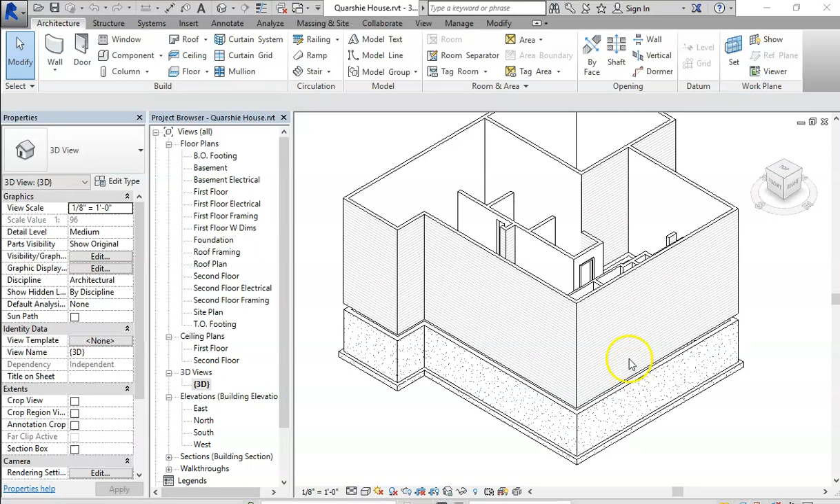We're in Revit. We're going to take a look at getting some floor systems in, but before we do so, I want to make sure that my walls are lined up with my foundations and that my walls are set to the right level. So I'm going to go to the first floor here. I'm going to take my template out of the way for a moment, and let's take a look at one of these sectional views to make sure that our wall is indeed aligned.

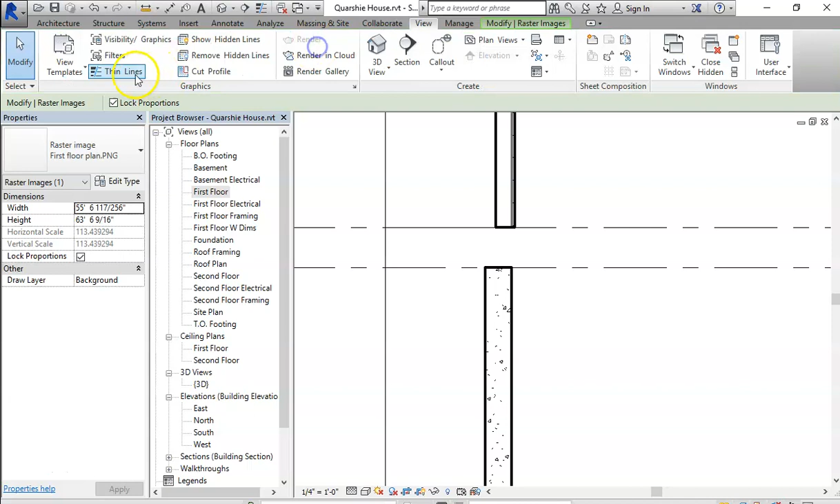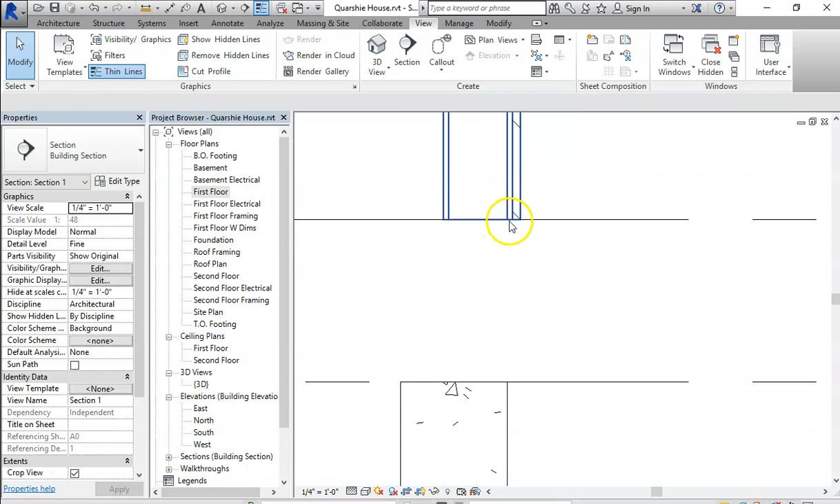When you're aligning walls, you want to make sure that your view is set to thin lines, which is right over here. And you want to make sure down here that your detail level is set to fine. Notice if it's coarse, I can't see anything here to get to the face of the core. So I've got my detail level set to fine, my view set to thin lines, and I can see that in this case the face of my core is lined up with my foundation.

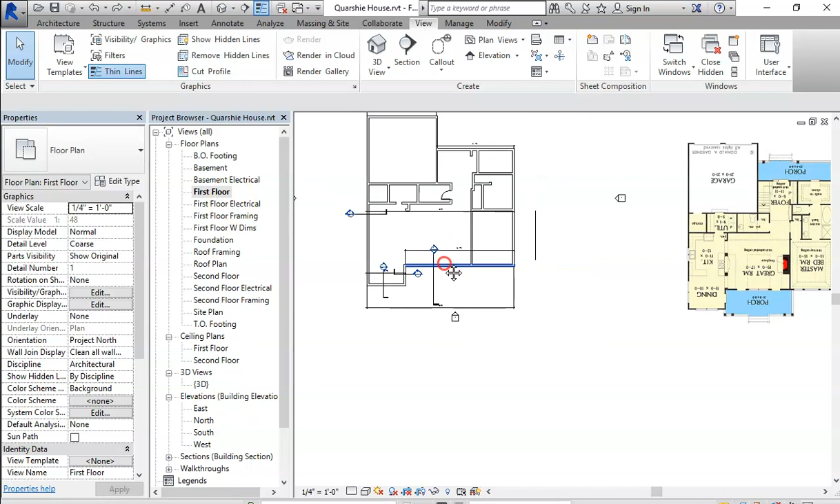As a matter of fact, if I click on it and move it, you can see that they move together. I'm going to hit undo because I don't want to move anything. So that's in good shape. Let's take a second peek and see if maybe some of them haven't been done yet. I don't see a sectional view over here, so I'm going to make a new sectional view.

So under view, I can go to section. I'm going to click right over here, and I'm just going to take the depth of my view in like this. Let's take another peek and see if this one's aligned. Once again, I can't see it yet because my view needs to be set to fine. That's set to fine. I don't think this one is lined up.

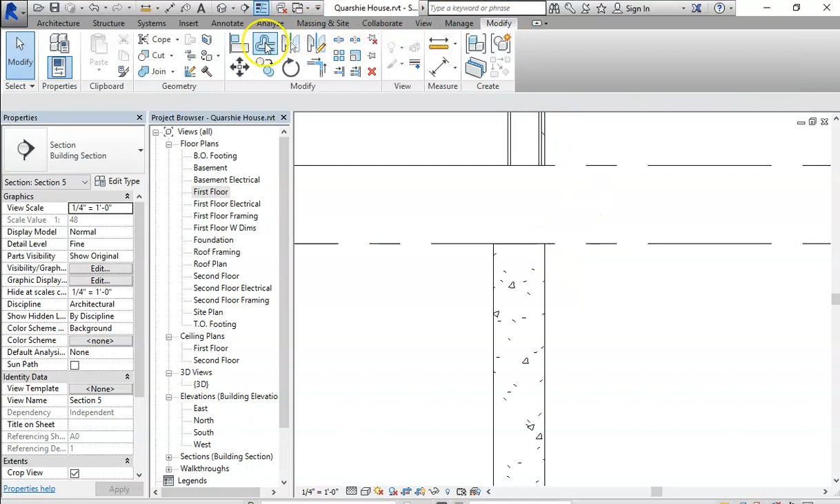So I'm going to go to modify. I'm going to go to the align tool here, and I'm going to select the face of the core. Select right here, and then I'm going to select my foundation, and I'm going to lock those together. All right. So that's how we take care of that.

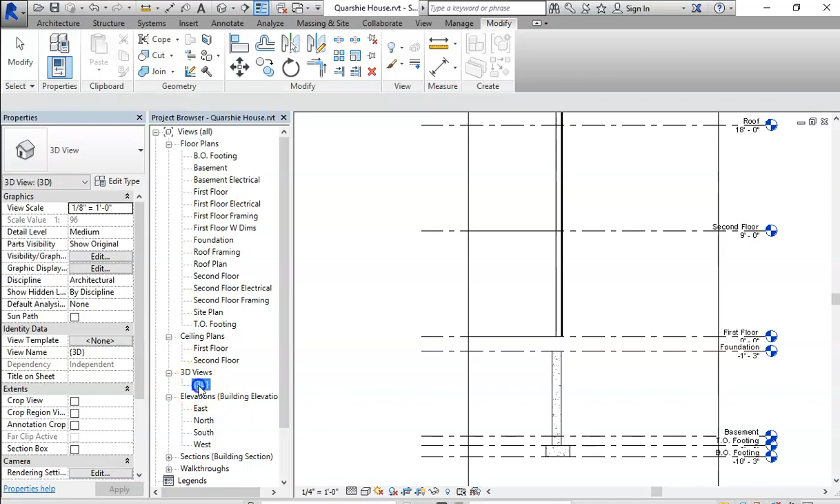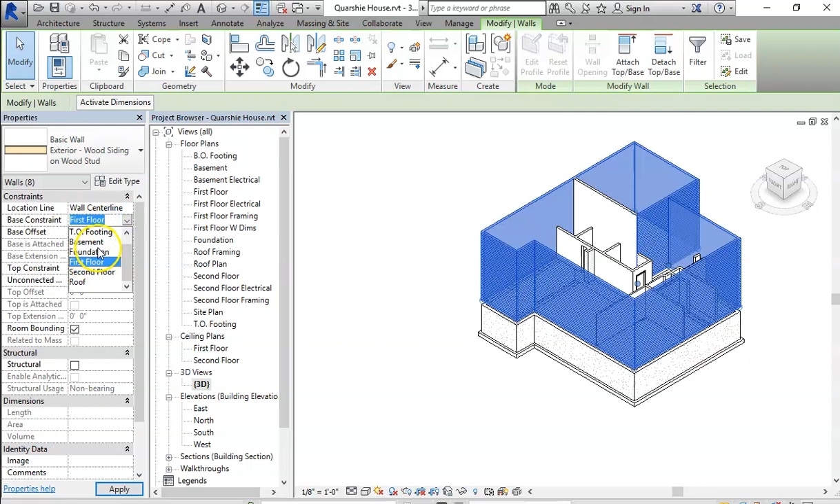I'm going to go back to my 3D view for a moment, and I can see that these exterior walls are not starting at the top of my foundation. So that's easy to change. I'm simply going to hold my control button down, and I'm going to select each of my exterior walls, and I'm going to come over here where it says base constraint, and I'm going to bring those down to the top of the foundation, and you'll see that it automatically moved those for me. I'm going to hit save because I'm happy with what I've done.

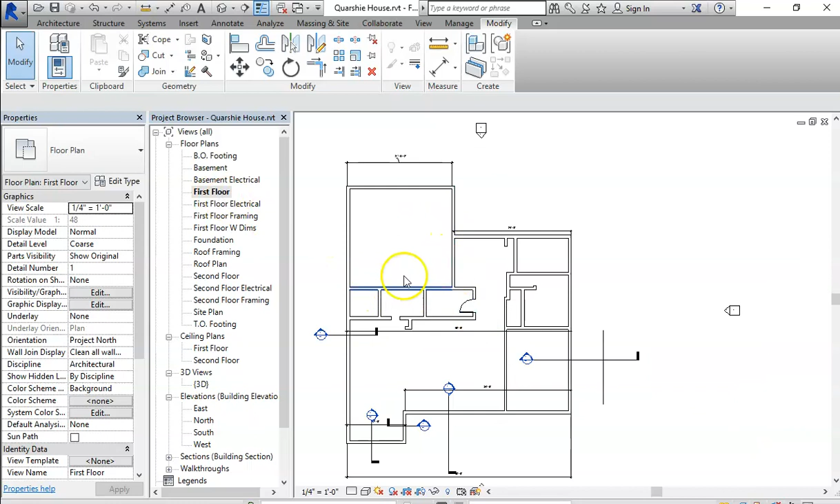Now on the inside of the house, I can see that these are exterior walls and they don't belong there. So let's go in and clean those up. I'm going to jump back to the first floor. Some of you probably have done that for your garage. You put exterior walls on the inside. So I'm in my first floor, and I'm going to drag this so it's just part of the exterior of the house. This one I'm going to delete altogether. And then I'm going to bring this back in for a moment so I've got a little bit of a guide here to draw my interior walls in.

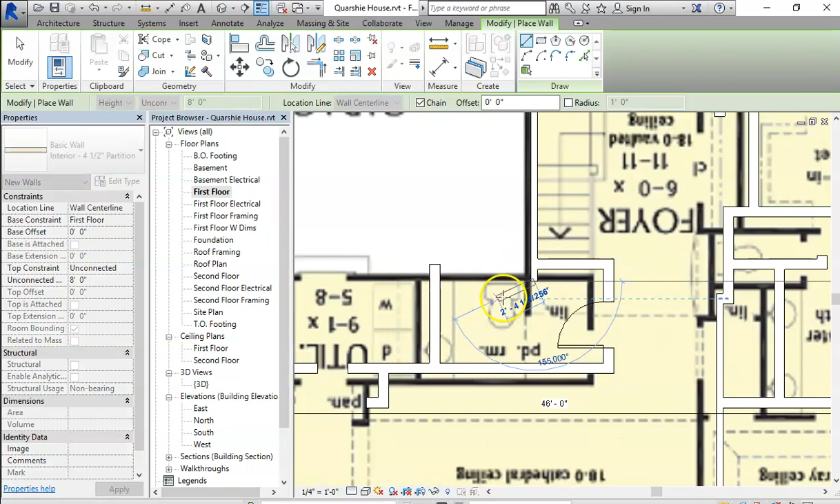All right, and I'm going to go to architecture and grab an interior wall now. So under wall types, I'm going to go down to 4.5 inch interior walls. And I'm just going to click right here and draw a wall across here. Now I can see that some of these other walls in here are also the wrong style. So I'm going to see if I can straighten these out.

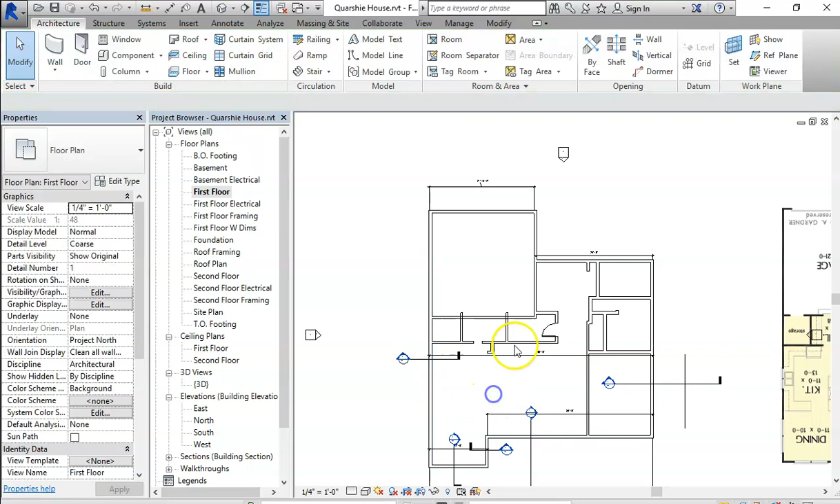Yeah, this is an exterior wall. This is an exterior wall. So if I hold my control button down and select some of these, I'm going to switch them to interior walls. All right, these walls actually need to go to here. So notice how Revit automatically heals those walls for you when you do that.

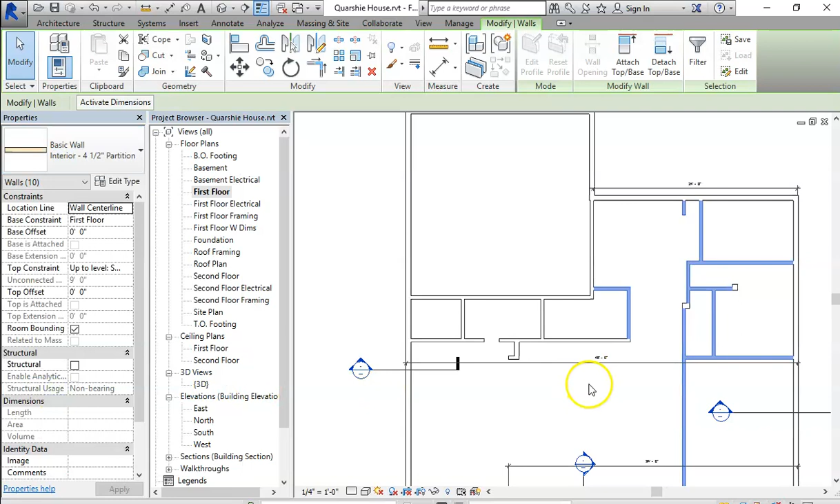I'm going to take that door out for a moment. Just select these walls and correct all of these wall types so that they're all interior walls. It says multiple types. Will it let me switch them all? Yeah, okay. So we're going to switch those. As a matter of fact, you could select all of these by just doing a click like this, and that will select them all. I can hold the control button down and select all these as well.

And it has multiple categories. We're going to see if we can, last time it let me do it. Why won't it let me do it? All right. Sometimes it doesn't like it when I have too many wall types selected. Here we go. This time it did. I don't know why. All right.

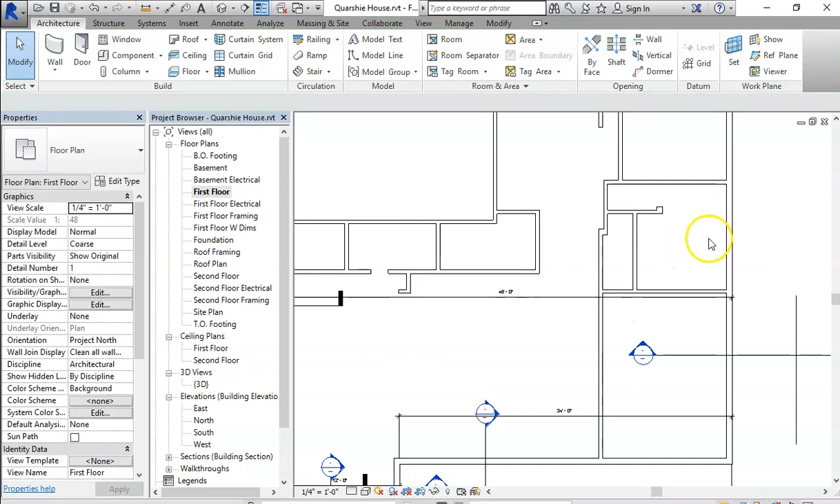So we're going to change them all to interior walls. I think I have a couple over here that need to get changed to interior walls. All right. That looks good. So now if I go to a 3D view, you can see that these walls inside here are all interior walls, and these are my exterior walls that are at the right level.

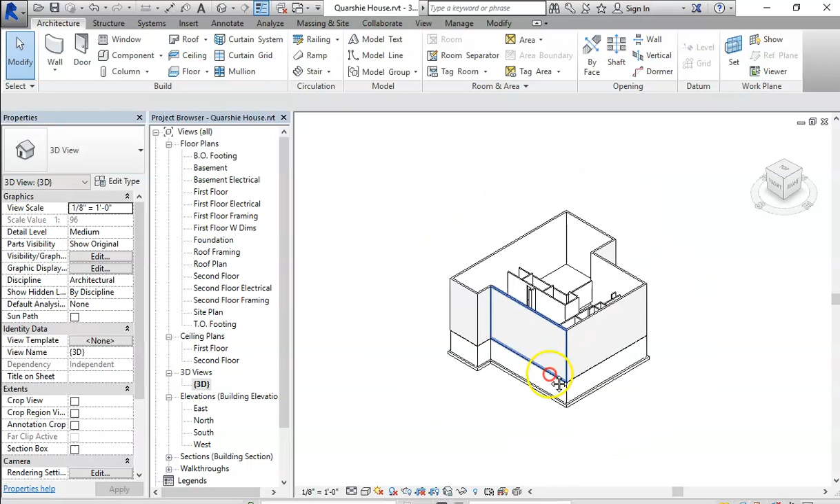So let's go ahead and put our first floor in. I'm going to go to the first floor to put the first floor in, and I'm going to go to floor. And let me just, I went there kind of quickly. Let me go back under, hit escape. All right. Under architecture, we're going to go to floor.

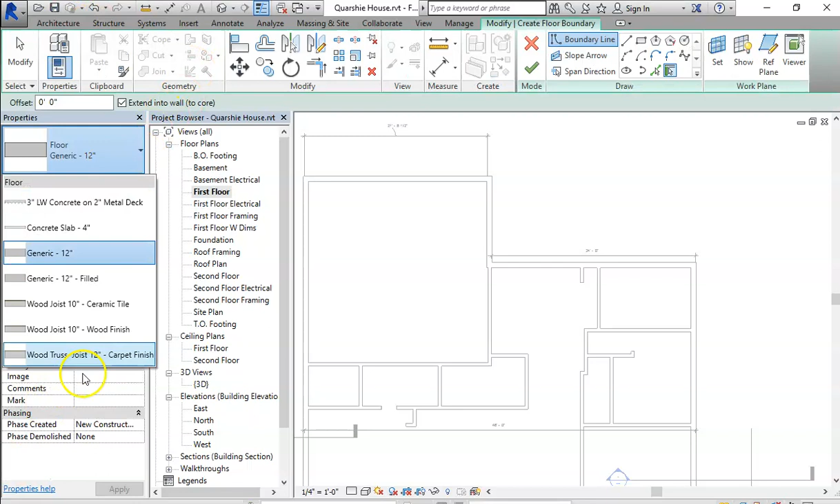And under floor type, there are lots of choices. I'm going to hit, oops. I'm going to try that again. We're going to go to architecture, go to floor. Not finding the one I want, but I'm going to edit this later on. So I'm going to actually go with a 12-inch joist floor with carpet finish. And we'll talk about how to change that later on.

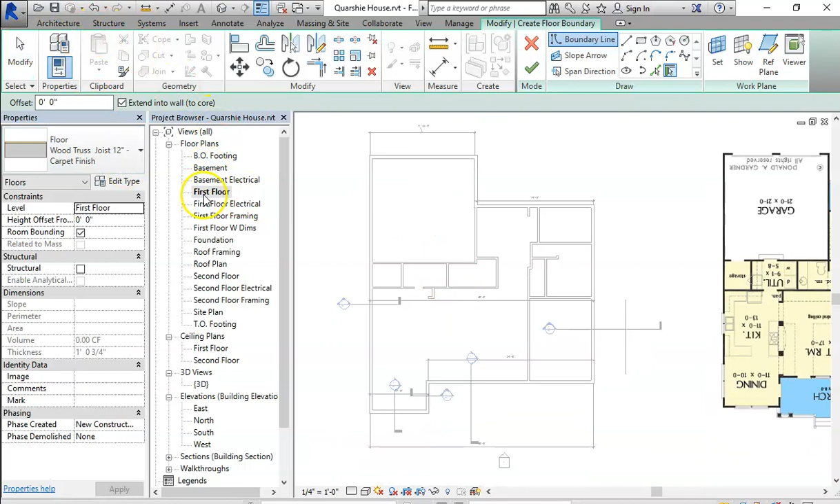So when you activate the floor command, you want to be on the floor level that you're installing it. And then you're just going to simply click boundary lines that represent the outside of your floor. Now, these are going to need to get modified. Notice that this line goes too far. So I'm just going to come in here and we're going to edit that so that it fits.

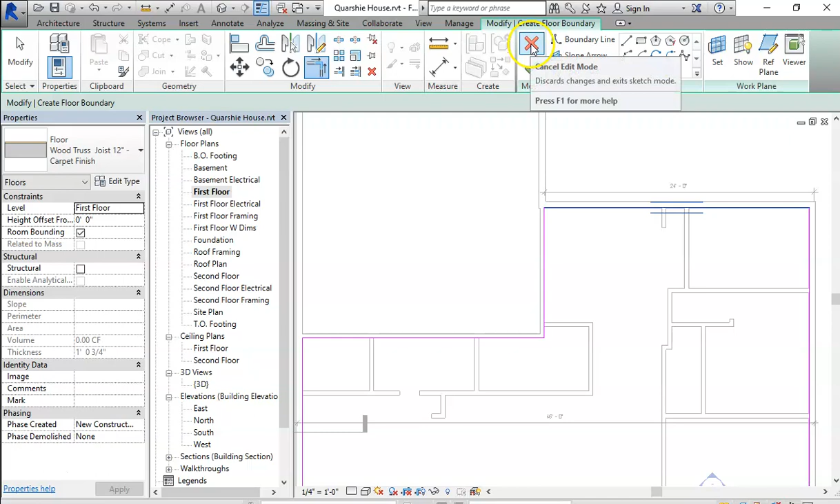Okay. So this guy right here, I need to select that one and bring it in. So let's see, we can use the trim command here, trim that in. All right, and now we need to move these out to our boundaries that are the correct boundaries. Right now I'm on the inside face of the wall and I want to move it to the outside. I'm going to hit OK for a moment. Just have it build my floor system, and now I'm going to show you how to edit it.

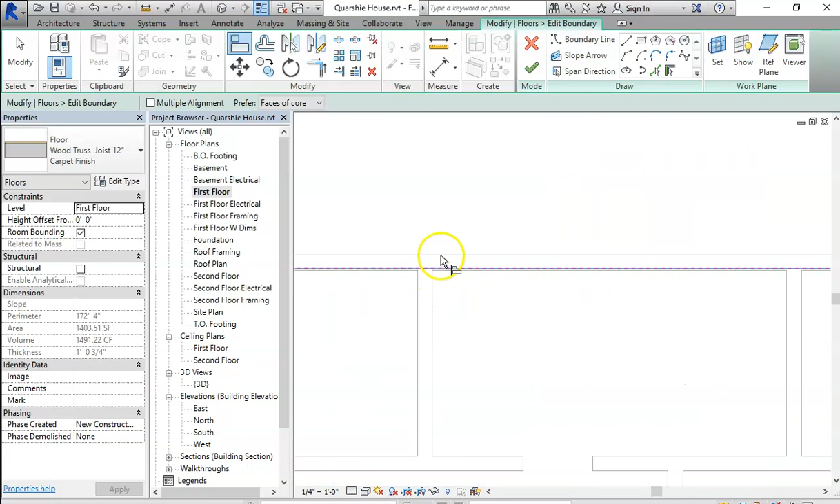So if I click Edit Boundary and I select my Align tool just like we did before, if I hit Face of the Core, I could come in here and align these things to the face of the core. Oops. Align, face of the core, select that. And I could lock all those there as well so that if I make any changes, the floor system will stay locked to the exterior part of my wall. Whoops, I want to do this one. There we go.

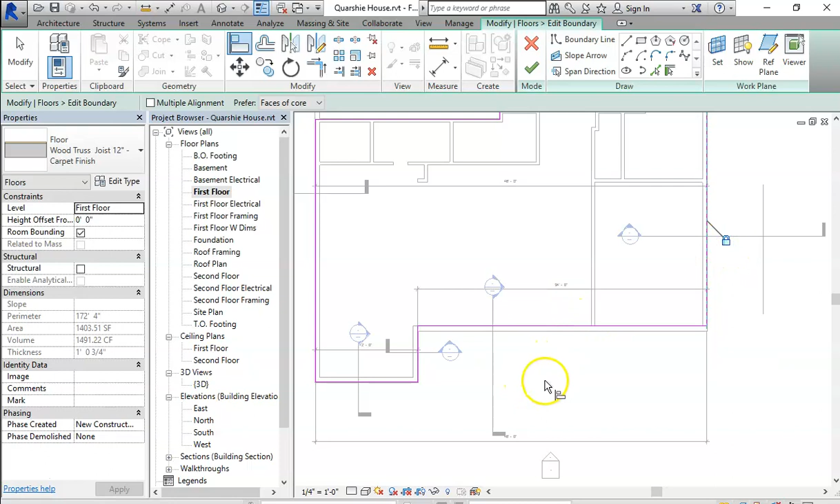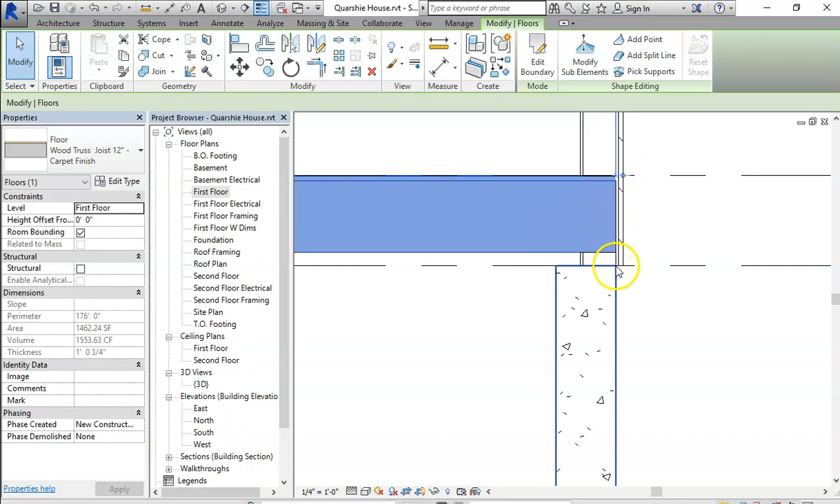Now I'm going to do one incorrectly just to show you what I mean by that. These I've all got correct. This one is incorrect, and I'm going to leave it there just to show you what I mean. Those are correct. All right, so what does it look like in a sectional view if you put your floor in correctly? I click on my sectional view and you can see that my floor is sitting on my sill plate and the wall goes beyond it down to the foundation. This floor is built correctly.

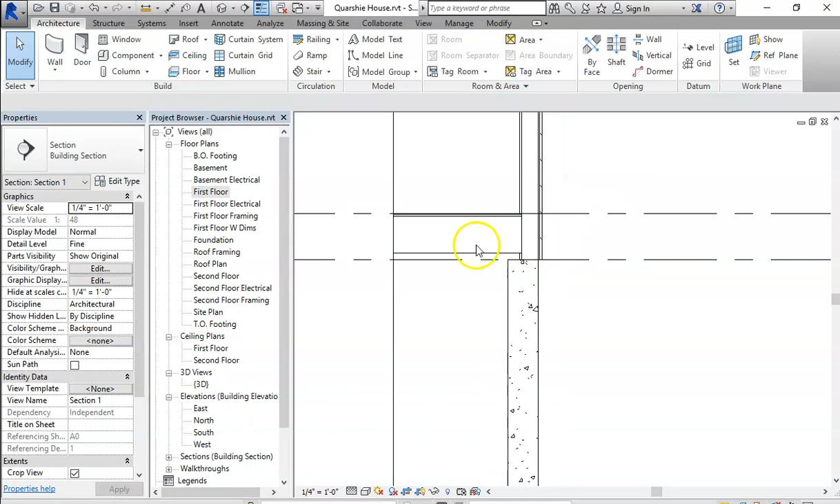If I go to my first floor here and I take a look at this view, you can see that the floor is not sitting on the foundation. It's floating on this little piece of sheetrock here. That's incorrect. So I'm going to go back to my first floor and I'm going to click on my floor system, hit escape. Should be able to click on it here. Why can't I select it? All right, modify. It's not letting me select my floor system.

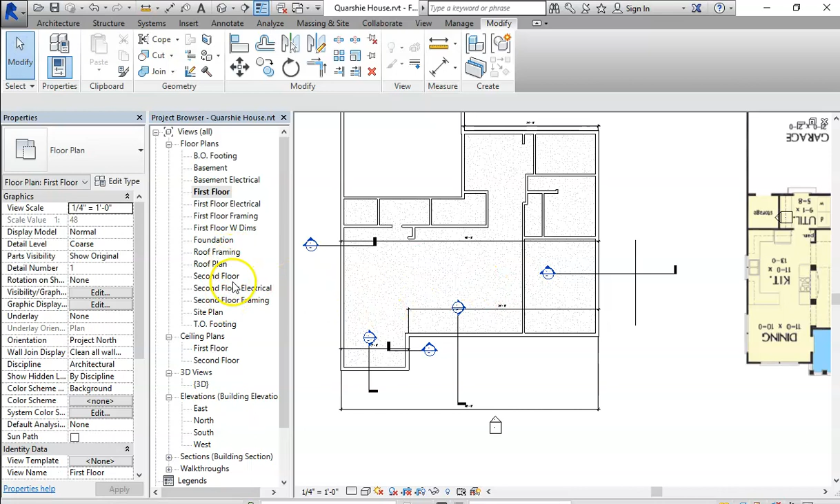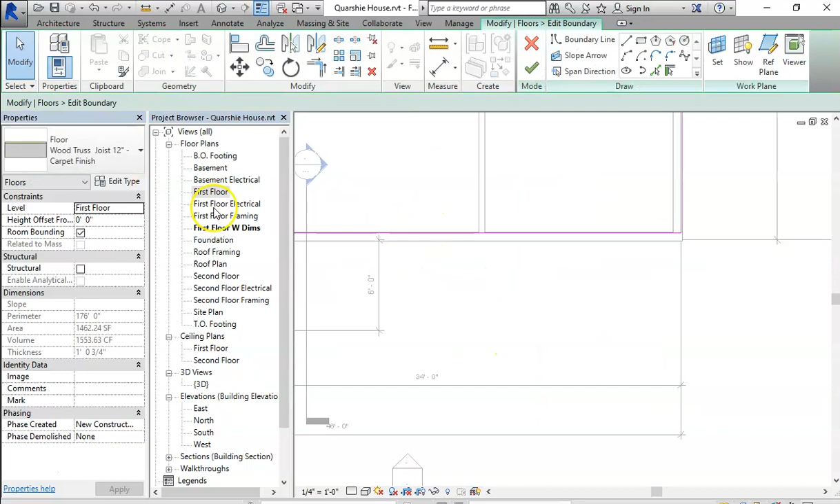For some reason it's letting me select the floor system in the sectional view. I'm going to hit edit boundary, and it's going to ask me what view I want to do that. That would be in the first floor. Doesn't matter whether it's with dims. And now this is that section that's not to the exterior wall. So I'm going to align that and lock it. And now if I hit OK and take a look at my sectional view, you can see my floor's in the right place. Let's do this one more time for a second floor.

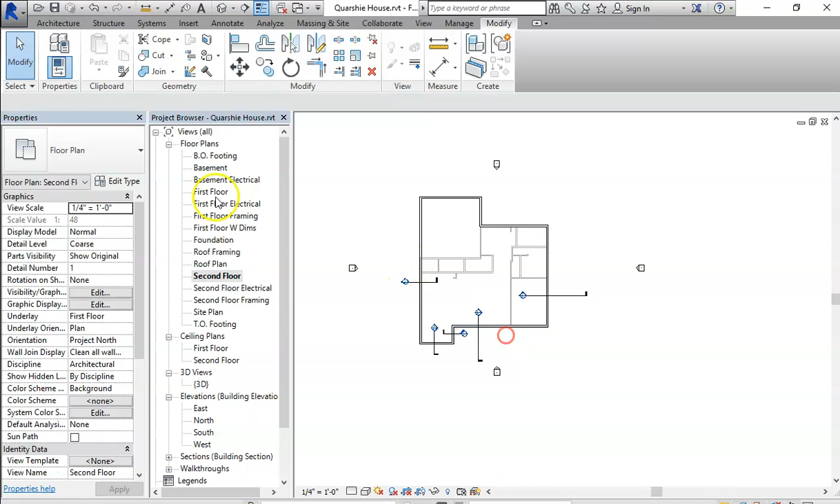So I'm going to go to the second floor, and for my second floor I'm going to go to architecture, and I'm going to pick the same type of floor system, which is this wood truss with carpet finish. And then I'm going to show you how to edit this later on.

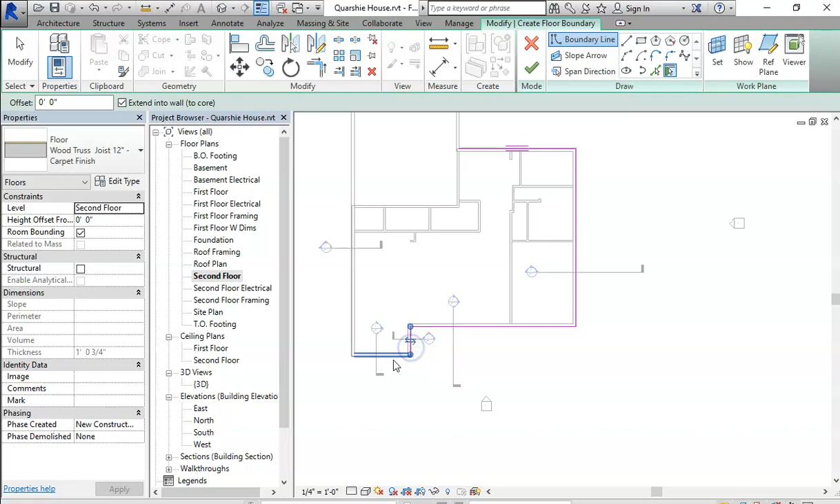So again, as a review, once you're in architecture and you selected floor, right now I'm on boundary lines. If I just click my exterior walls, I'm good. Now in this case, when I click them, it's snapped to the exterior face of the core, which is exactly what I wanted to do.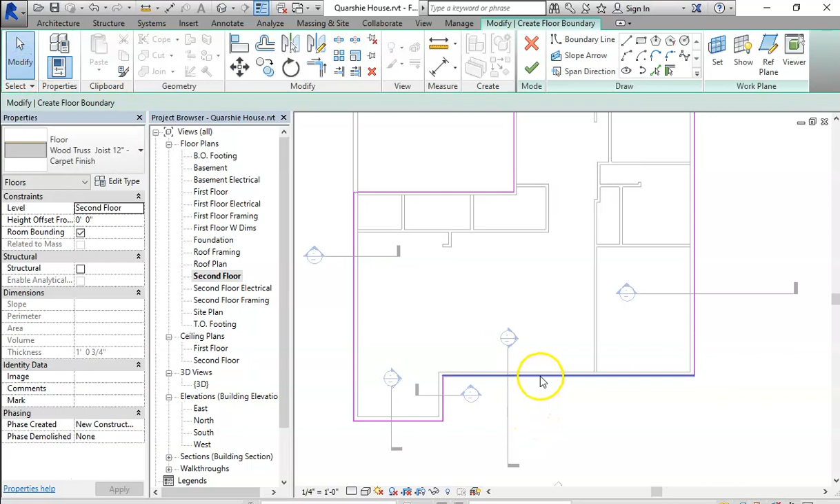All right. I need to trim this guy, so I can go to my trim command, select these two, and that trims that out. If I click on one of these, you can see that I could move it to the inside face of the core, but I don't want it there. I want it on the outside. That's correct. Now when I hit OK,

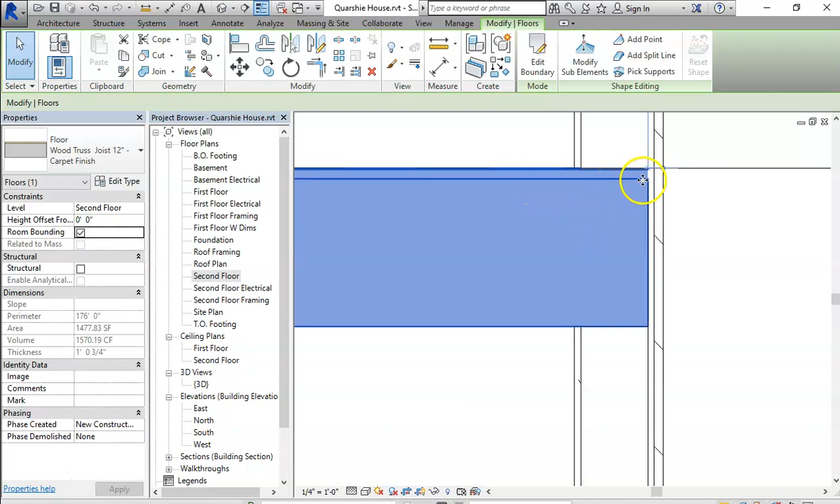if I take a look at my sectional view, you can see that my floor is sitting on top of my wall as it should be. We're going to get more detail on these sectional views later on, but this will at least get your floor system in there.

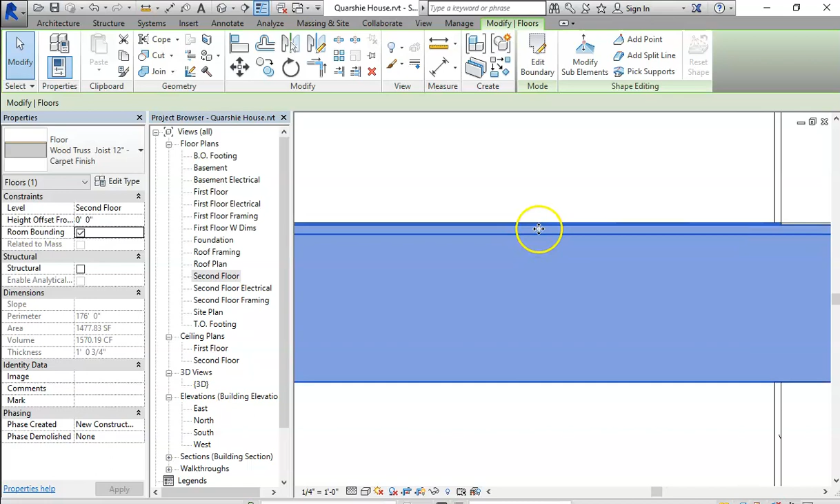While we're in here, I want to show you how to edit a floor system, because first of all, I don't want carpet on my floors. I want to put a hardwood floor in, and I also want to put some sheetrock on the bottom of that because I want a finished basement. And in this case, I want sheetrock to represent my ceiling for my first floor. So how would I do that?

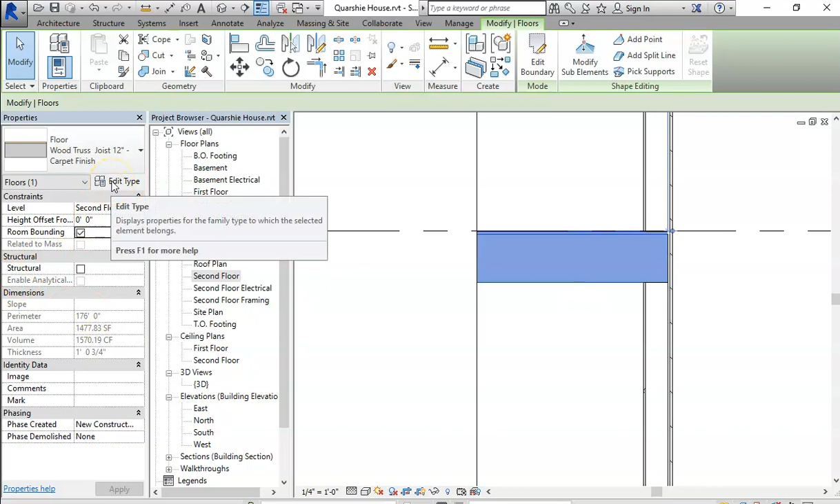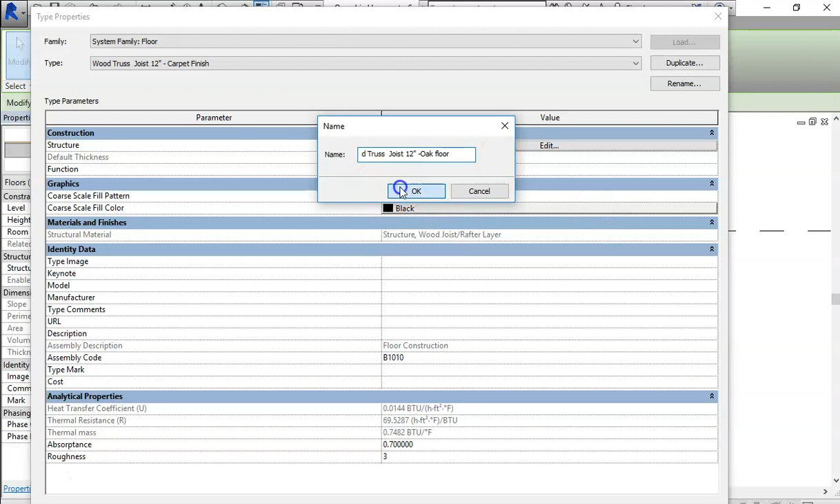So we could go to Edit Type over here, and it launches this. I'm going to say Duplicate, and instead of calling it Wood Truss Joist Carpet Finish, I'm going to say Oak Floor. Hit OK. And then under Structure here, we can hit Edit, and we can start putting things in. So this is what makes up those layers.

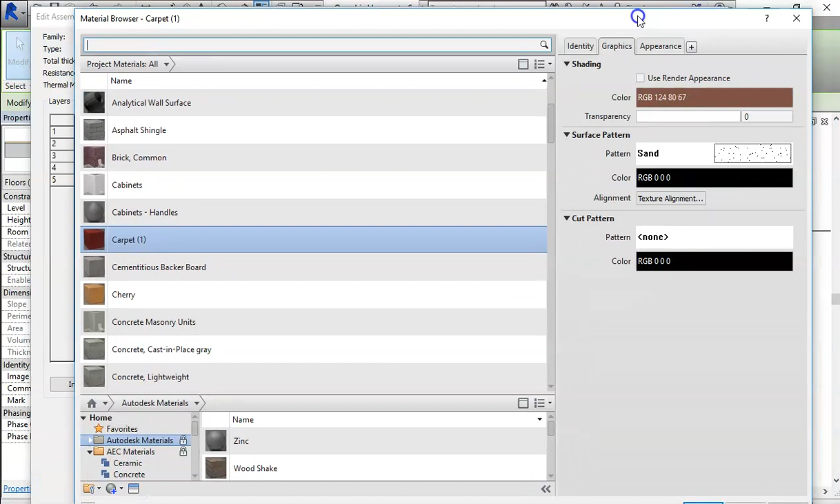Right now, this is set to carpet. I'm going to click on Material here, and it's going to launch all kinds of materials that I could have for my floor. I can search oak, and I can click oak flooring. And I hit OK. Now it says oak flooring, but it only has a thickness of 1/8 of an inch. Oak flooring is usually 3/4 of an inch. So I'm going to put in 3/4. And I've got my oak flooring in.

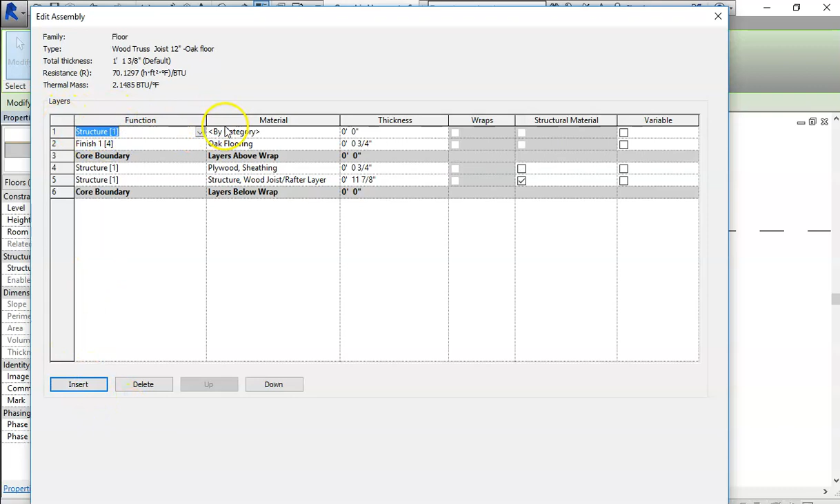Now I want to add another boundary here, so I'm going to say Insert. I want to move it down to here though. I think I can just move this down. Oh, here we go. I got to select the one that I want to move, and I want to move it down. So it's on the bottom now.

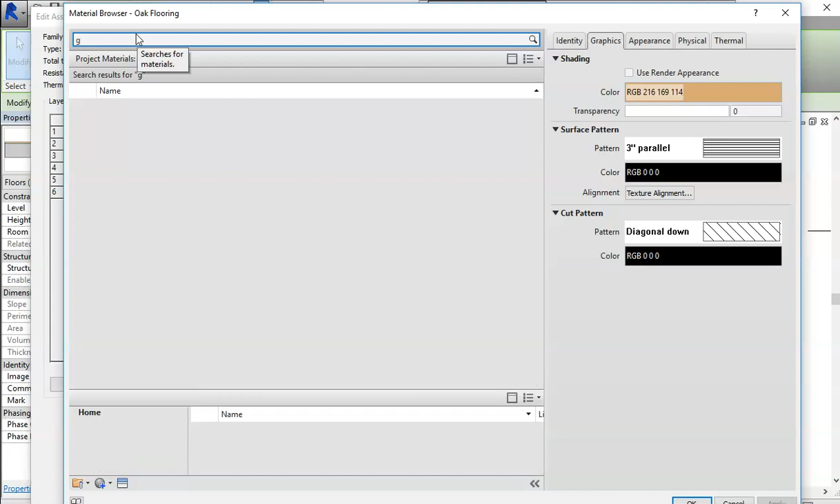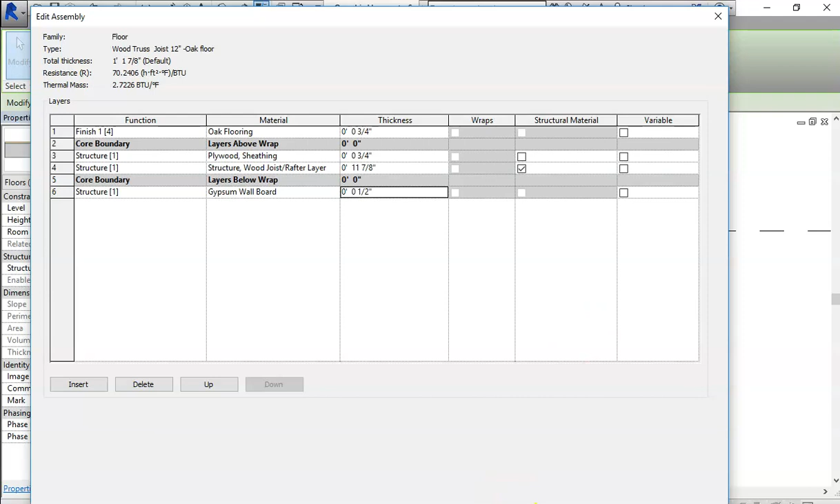And then for material, I want to put gypsum board in, and I don't even know how to spell it. Here we go, gypsum wall board. Hit OK. And then for thickness, I'm going to put in a 1/2 inch. All right. Hit OK. And now this is wood truss joist oak floor. Let's see what it looks like.

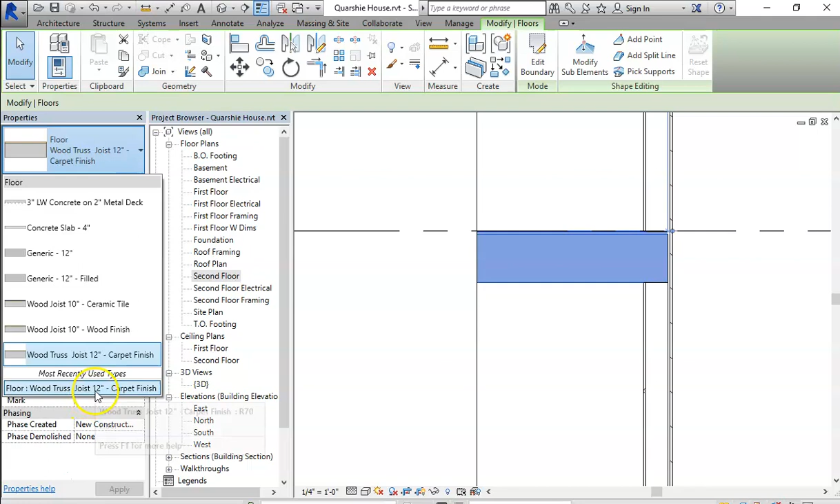So I'm going to select this floor that I put in and change it to... Why isn't it there? I must not have saved it. Ouch! I got to do that again. Edit type. Duplicate the name. I made a mistake. Do this all over again. Oak. Hit OK. Hit edit.

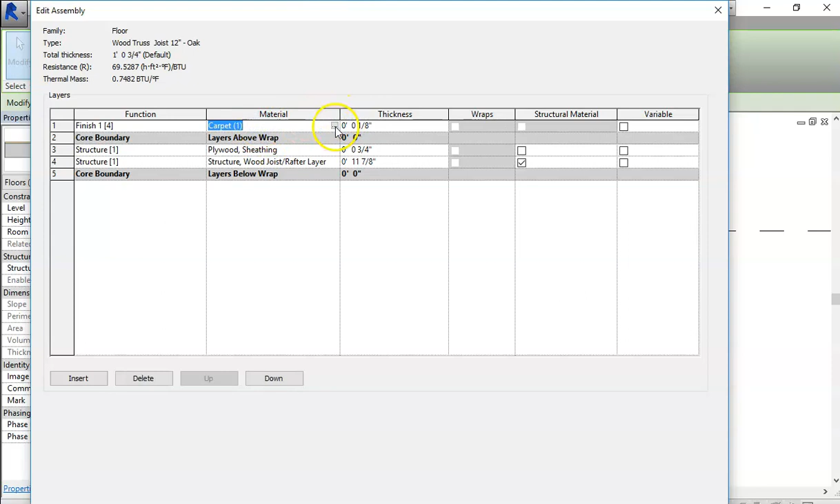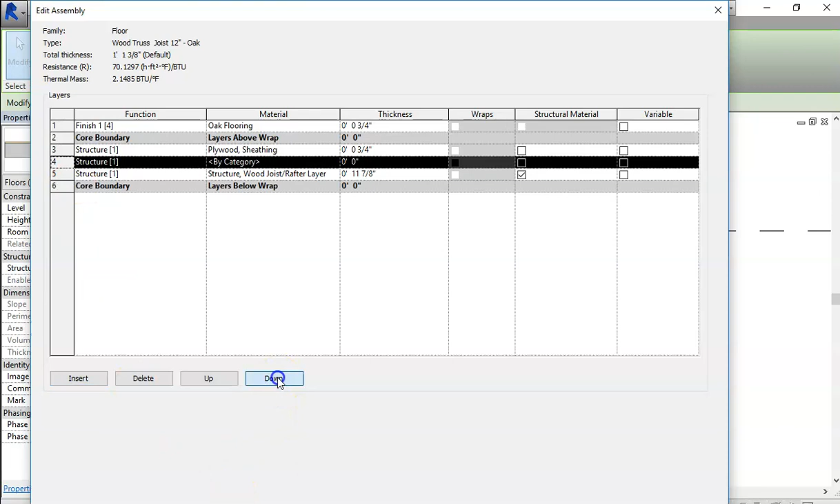I'm going to change this carpet material to oak. I can just do a search for it right here. You could put cherry flooring in if you wanted to. I'm going to change the thickness to what is appropriate, and I'm hoping I'm going to get this right this time. We need to insert a layer, and we're going to move that layer down by hitting this button. And I'm going to change that to gypsum board or sheetrock. Hit OK. Change the thickness here to 1/2 inch.

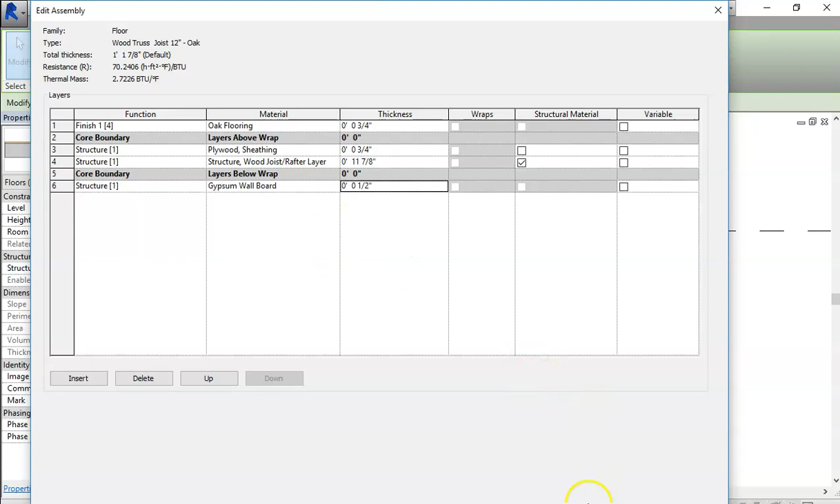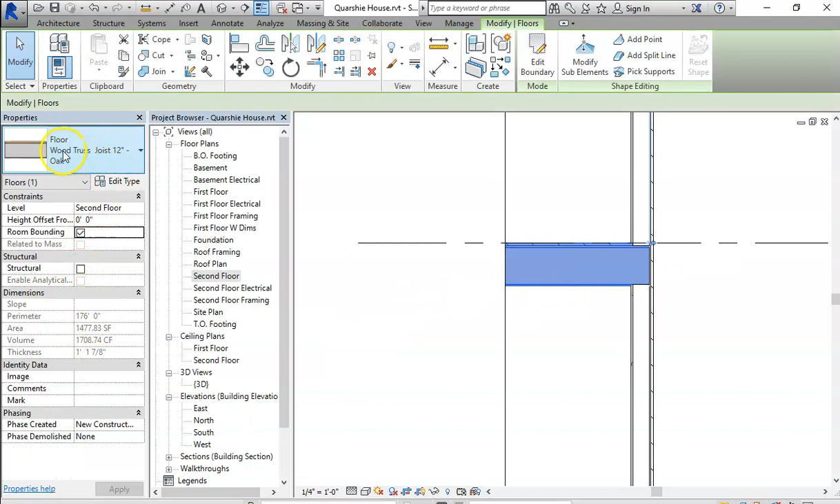Okay. Now what happened here? So this, it should. There we go. Now it's updated. So now if I click on this floor, it says wood truss joist oak. It's the rename. Let's take a closer look at it, and you can see that I now have oak flooring up here with a 1/2 inch of gypsum board.

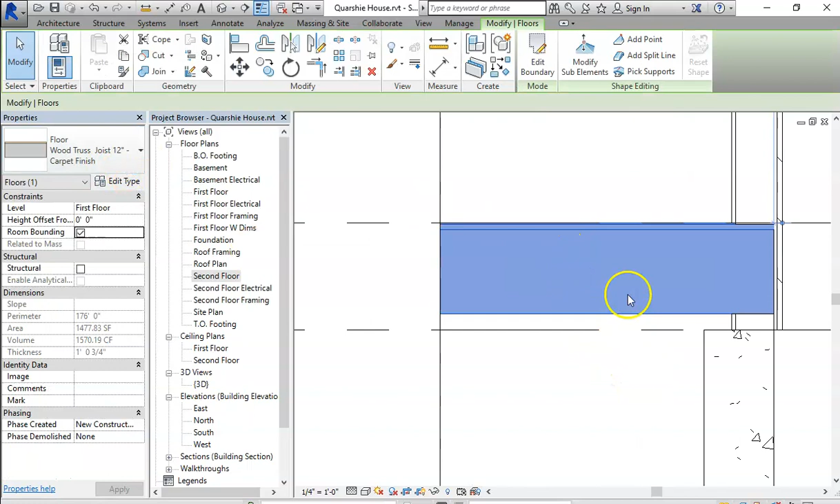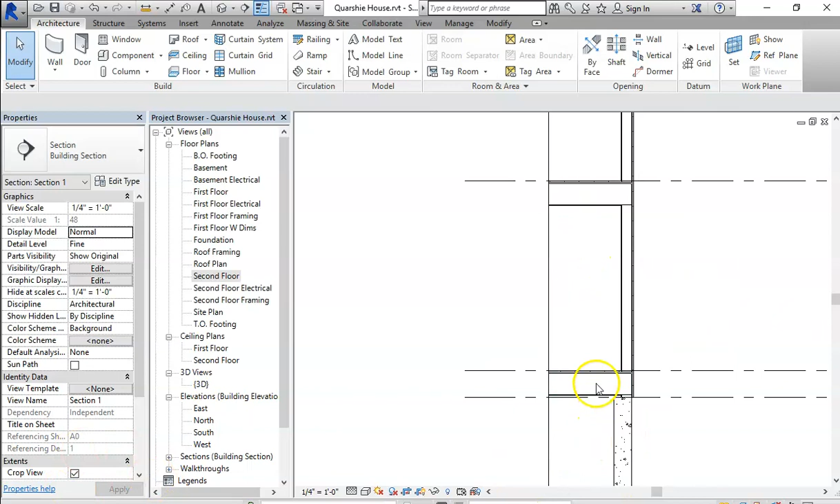Let's go take a look at the other floor that didn't change. This is the one that was the carpeted floor. You can see that there's no sheetrock on the bottom, and it's only 1/8 of an inch thick of carpet. We can click on this floor and also change it to the new style that we've added, and now the whole system gets a little thicker, and we get the oak floor that we're looking for. All right, that was a long video because I had to do it twice, but that's okay.